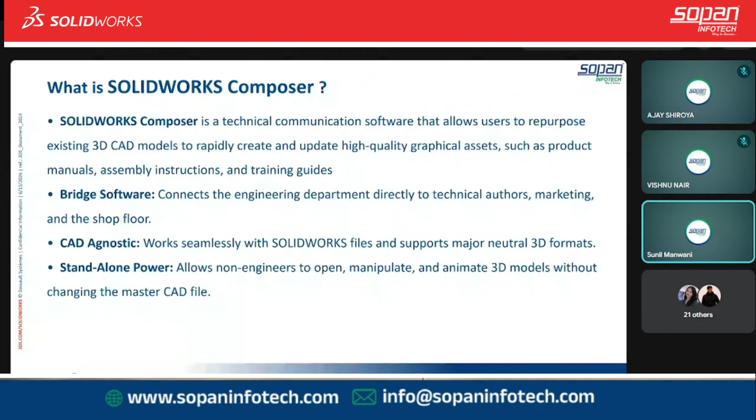So what are the technical challenges we face in daily life without SolidWorks Composer? There is a broken data associativity.

Documentation updates become manual and time consuming whenever the design changes. Every time there's a design change, we have to create the model again, take a screenshot, then input it into a service manual or similar document, or make exploded views repeatedly. That time is significantly reduced in SolidWorks Composer.

Engineering teams spend unnecessary time preparing screenshots, manuals, and illustrations. Let's say somebody is working in an NPD department. This is a very boring process for them, making manuals, taking screenshots, and defining everything that even a simple non-CAD user could do.

We can create exploded view animations and assembly instructions without failure and without significant effort. We can easily manage those.

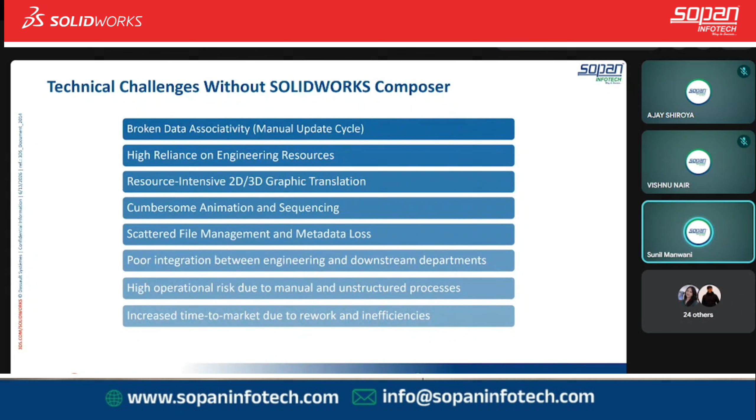These are the kinds of deliverables we can easily make, like instruction manuals, sales and marketing content, or maintenance manuals showing where to lubricate and how to assemble the equipment.

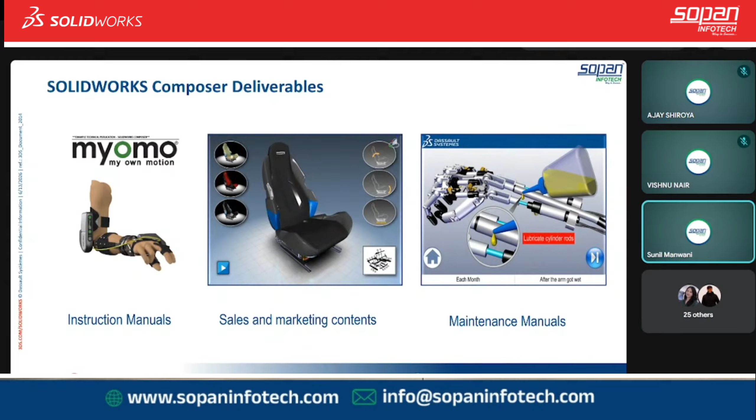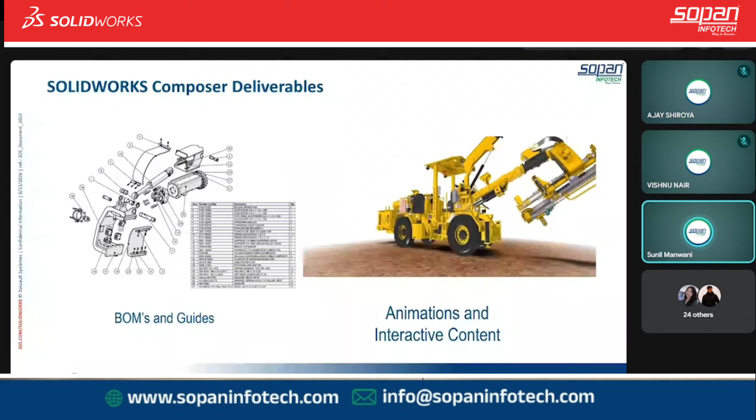Then we can make a BOM guide. We can show each part very clearly, what components are used, how much, what the quantity is, and we can also make animation and interactive content.

I will show some deliverables we can create from SolidWorks Composer. Here's an operation manual you can see made simply from this. I made this document purely from the Composer only.

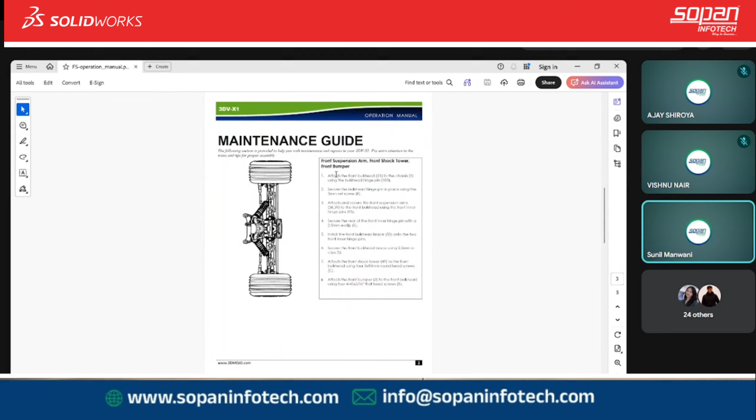So this is kind of a maintenance guide you can make. This is the everyday documentation we used to make, and we have to make it easier for the customer's process.

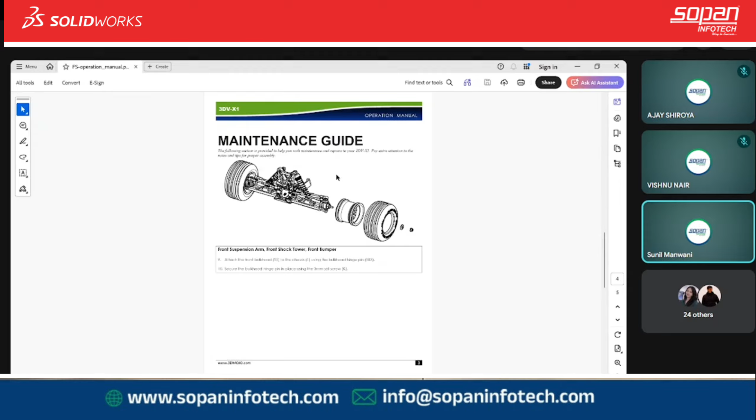So this kind of suspension arm is there, and we want to show how it will open and how you can do the maintenance. You can make this kind of guide. What upgrades are there, you can also show this.

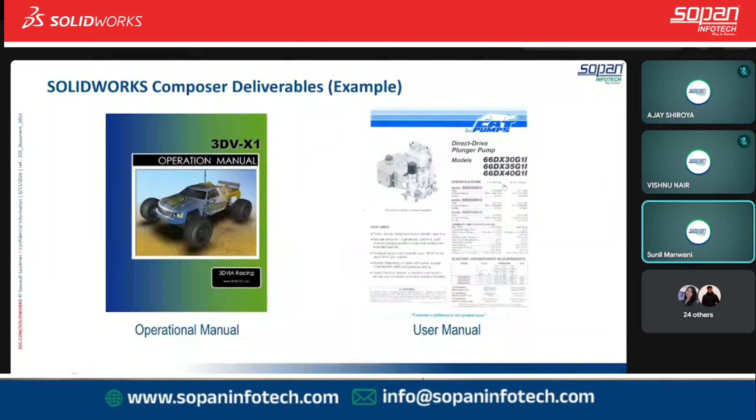Similarly, you have seen this kind of document also. If there is a pump, we have to define the whole format and everything, what parts are being used, and how they will assemble themselves. That we can also illustrate.

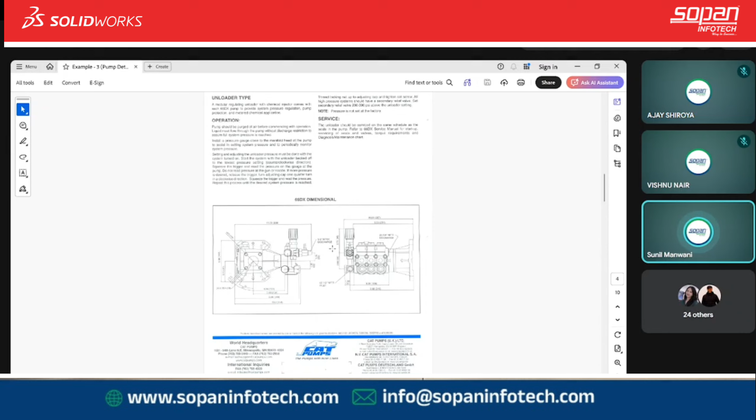This kind of product we can easily make from the Composer. As you can see, the dotted line shows how it will fit and where it's coming from. This kind of detailed illustration makes it easier for the maintenance guy or service guy to assemble or disassemble the components.

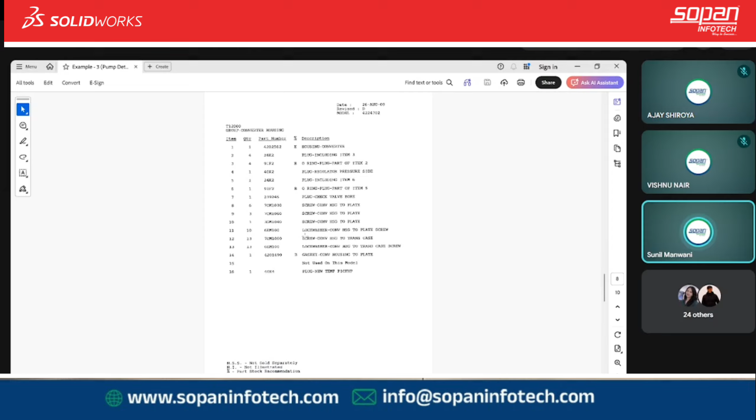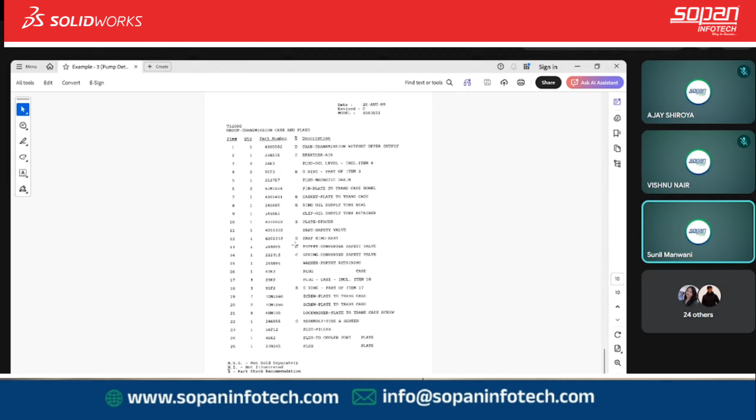You can numberize everything, so whenever there is a part change, someone can significantly reduce the time to find the name of the part, and you can replace the part very quickly. You can define what part this is, and this has only the details.

Similarly, if I want to show a customer how the product will look, what dimensions are there, and how it will turn and everything.

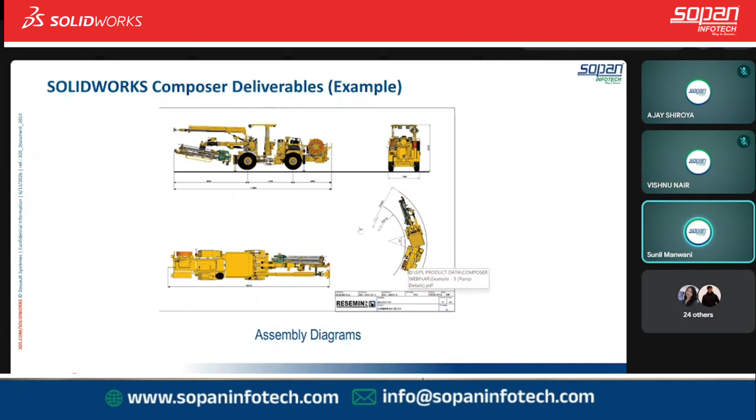We can take it out this way. We can make it in this template also, or use this template also. If you want to define the BOM of the product, we can do this. It's a very easy and convenient way to show, and that too without any CAD software knowledge.

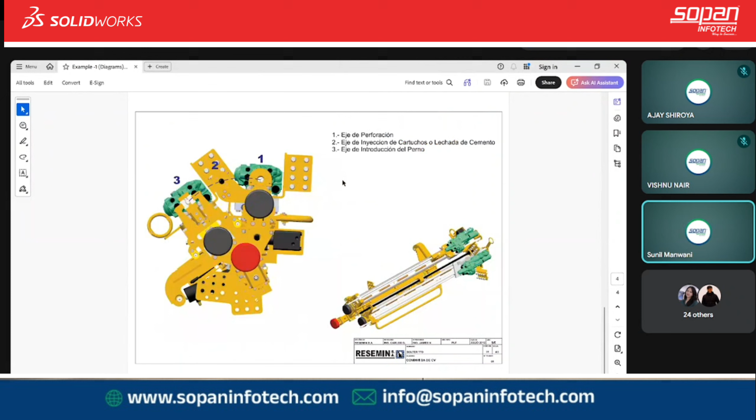So we will quickly go through the live demonstration, how it will help us and how we can convert those.

So let's say I open one document. Okay, so we talked about the animation part. They have made one animation out of it. You can see, if I play, I can make this in a template also.

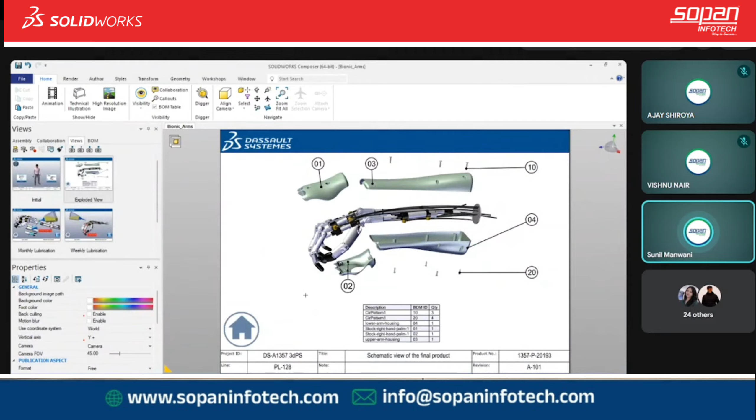In this kind of template, I can make it easily, and it's so interactive. I can make it in a PDF also. If I click this, it will show me the detailed BOM of the part. Okay, then if I click to the home part, it will come directly to the same position.

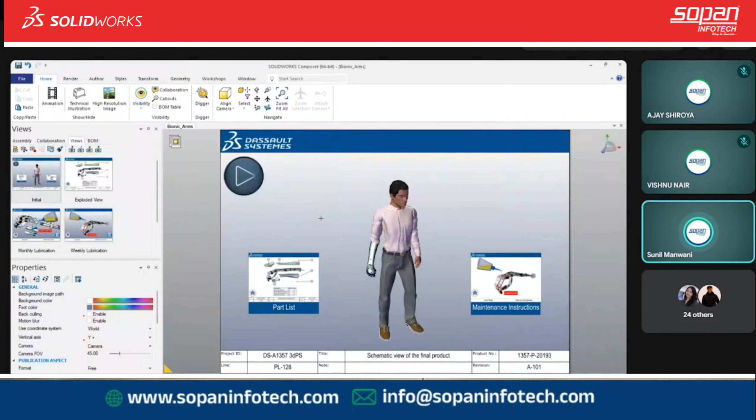Similarly, if I click on this, it will show where it is coming from and how it will move. We can make these kind of animations also. Okay, if I want to make, let's say, a video, how it will assemble and deassemble. So I will play just one video of what I have made out of this. We can do this in the same also.

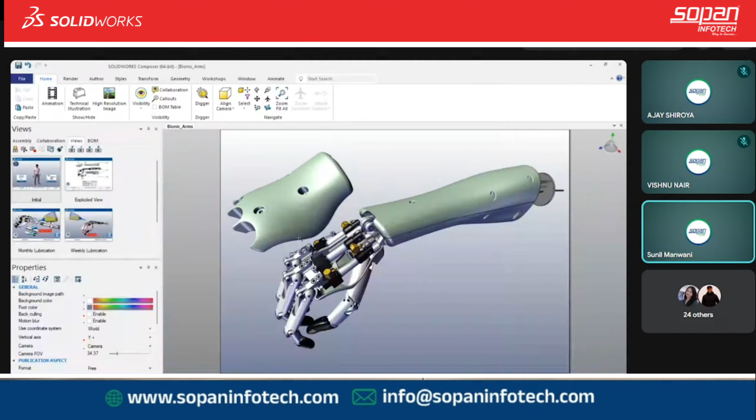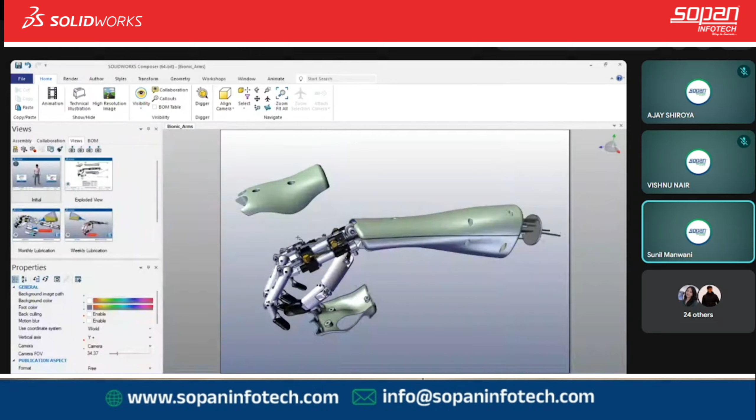A very detailed video and detailed explanation of how we can make interactive videos, and you can easily see how it will move. It will take a moment to easily assemble or disassemble the product.

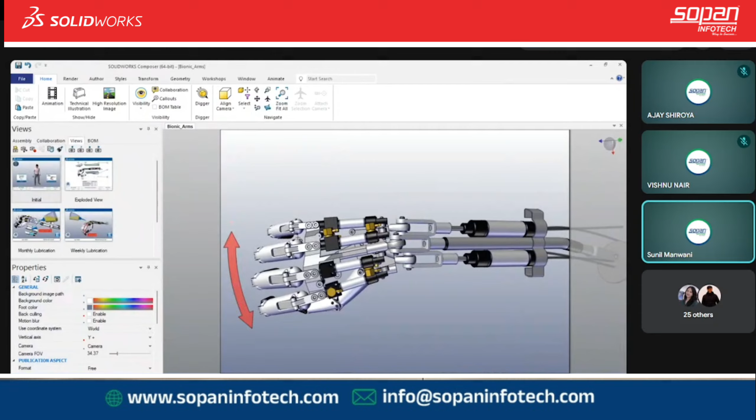You want to show how the signals, which wire cable, are responsible for which movement.

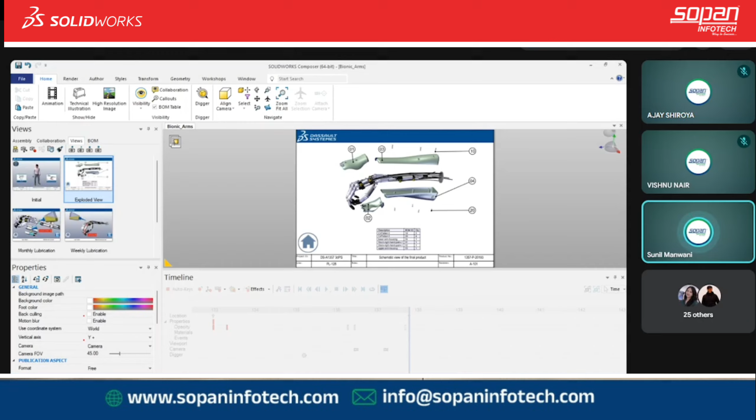Similarly, if I want to, we can exploded view and BOM out of it. We can also see that. And if you want to make this, there is a BOM table. When we click this, it will open the animated tab. You can see and close this.

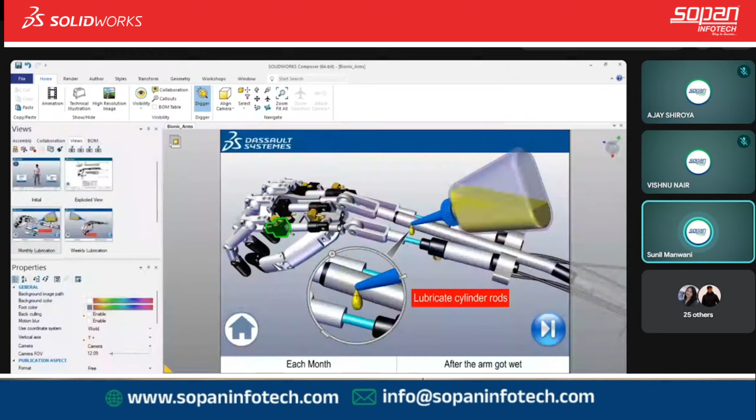Okay, now if I want, so these kind of animations and views we can create and make it easily. This shows exactly where we want to do it. Similarly, the video will show how the movement will work, how to make this, how it will look in the front view, or how it will move around like this.

And when you open any file in this, just like a feature tree or a component tree, you can see there is one component tree also there. So whatever you want to choose, let's say I want to show only this part and the other part should be hidden.

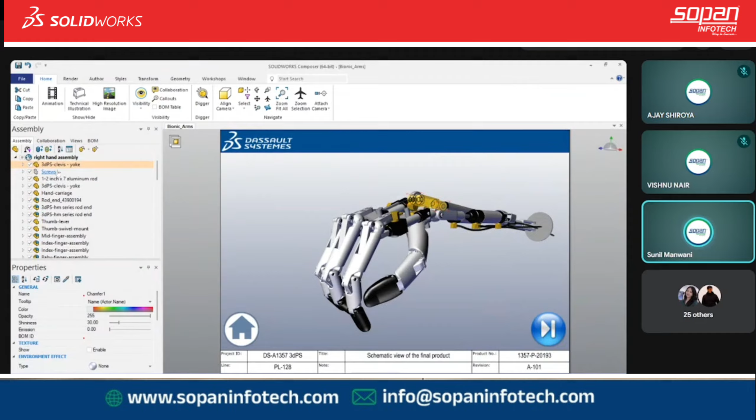So whatever I do, click, and let's say I want this also. I will just right click on it. There is some eye icon. You can see the show selection and hide others. It will show that certain part only, and then it will zoom it out for you. Okay, now you can work on it.

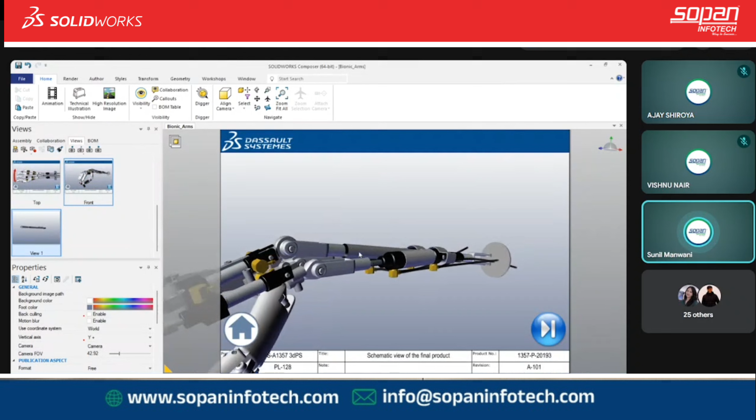Similarly, if you want to capture this view, you can simply create a view out of it. Okay, so it will show like this. This is the original part, and this is the view you have created. Okay, it is that simple. You don't have to just move it around and everything. A simple non-CAD user can easily make this.

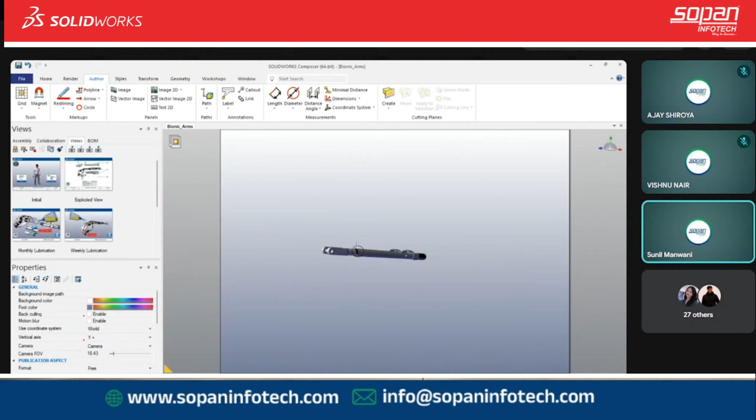Similarly, if I want to, let's say, indicate some part, you can create this. Okay, that also you can create. Similarly, in author you can create some arrows also, for whatever you want to do.

Now let's say you want to open some different kind of documents. Also, when you open files, as I told you, you can use different kinds of components and files - all kinds of files are supportable. So you can see there's one STEP file also, in 3D XML. You can open IGES, you can open STEP file, PTC, Pro/E file, assembly part file, Pro/E family part use. So it's not just limited to SolidWorks. If you have any kind of CAD solution, you can use this software to create animated videos and everything.

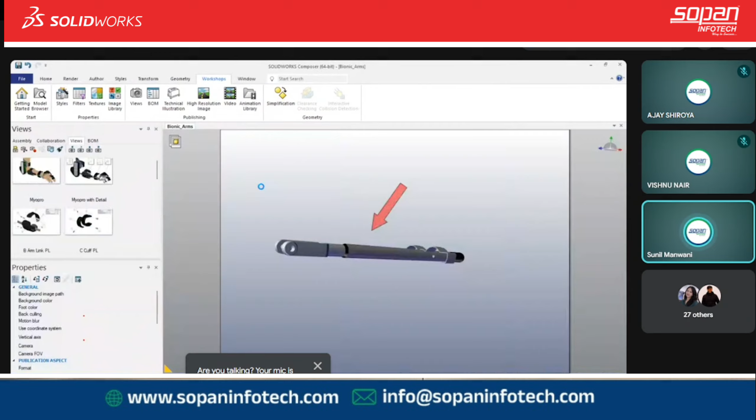Let's say you should open some instruction manual. Okay, so this is kind of an instruction manual I want from this. If I want a detailed view out of it, so I have made one view like this. You can show that image and the product numbering also. Let's say I want to create a BOM out of every product. Yeah, you can create a BOM like this.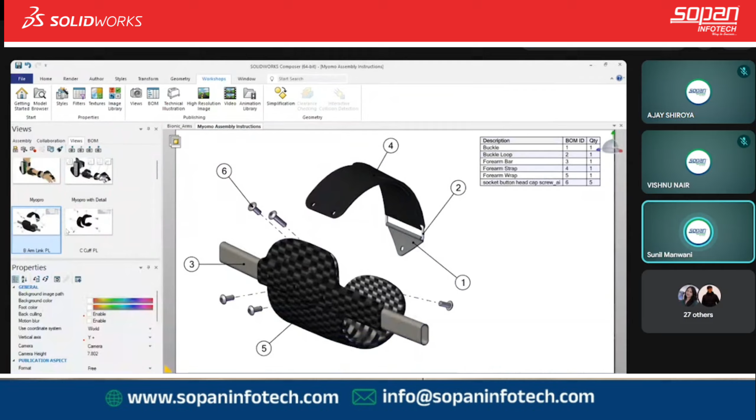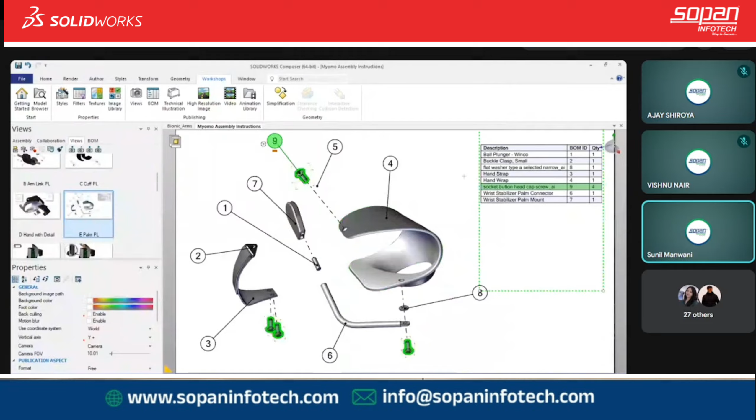Similarly, we'll create a BOM for this. It's a very interactive kind of software. You can easily make and create parts and everything. You can create an exploded view and animation out of it, with the BOM also inside.

Let's say if you want to show the maintenance guide, this is the battery opening, and you want to create a battery opening out of it, and create like this, how it will assemble. It's simply very easily created.

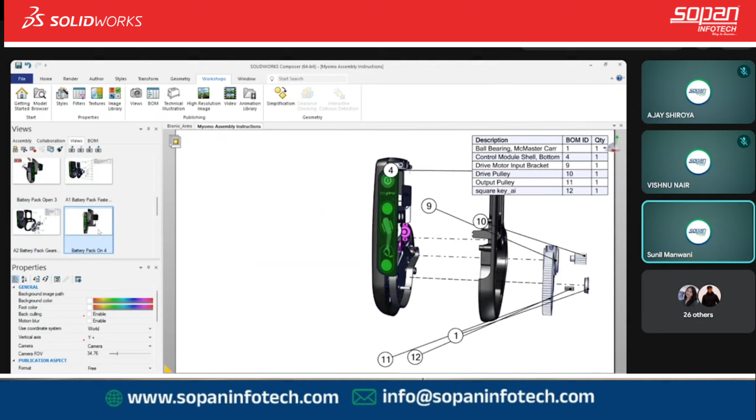Every view you want to create, if you want to highlight one component and hide others, you can click in and see the right icon with so many options. If you create this show selection and ghost others, it will ghost the other documents also.

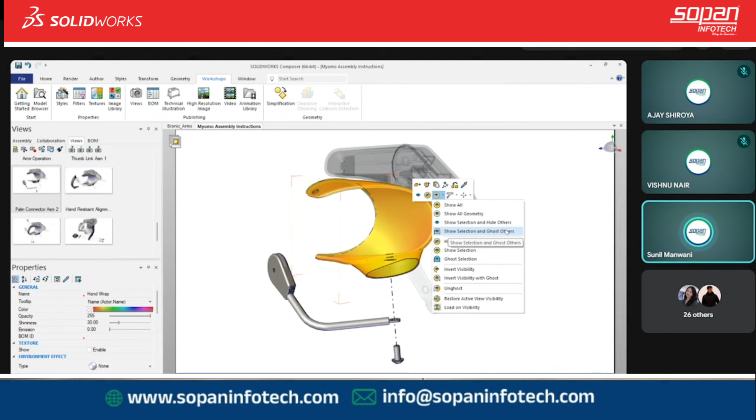Let's say I'll go in this document. Now I just want to show this component, the grasping motor cover, or let's say the grasping assembly. I want to show it and also select this. Now if I want to select only this component, I can do this.

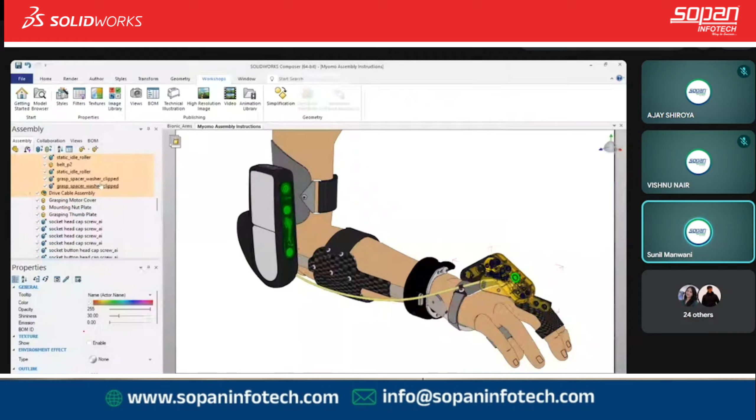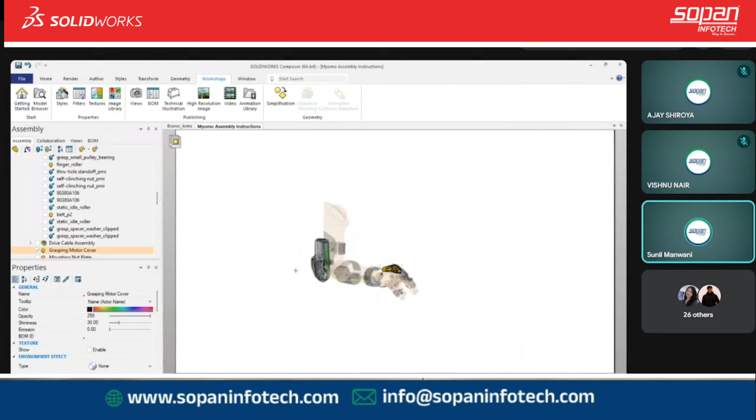Now I want to capture this. Okay, it will zoom in for you already. We just want to capture this. You just create a view. Let's say you want to name it grasping assembly. So it is that easy.

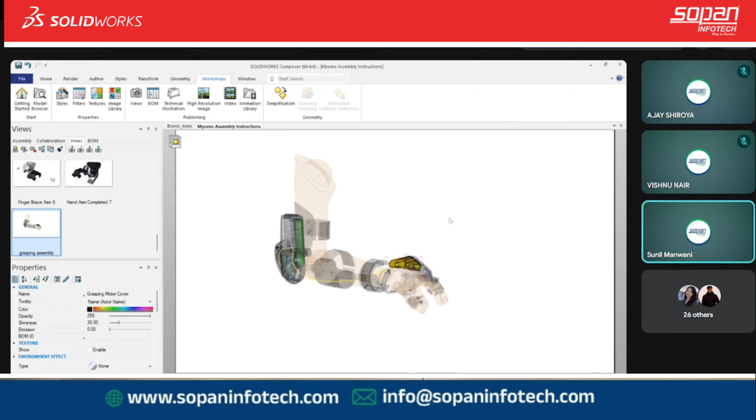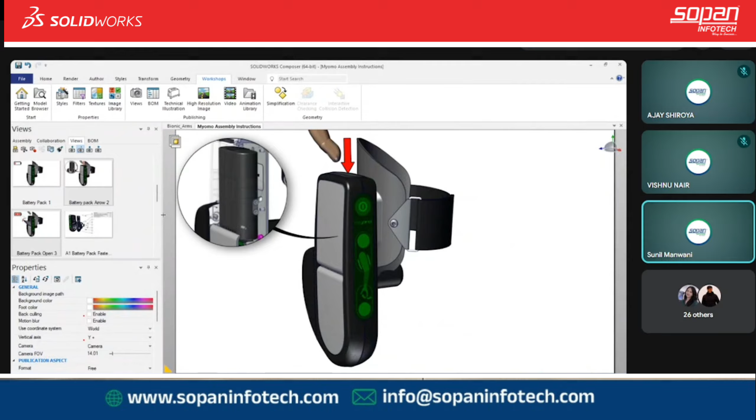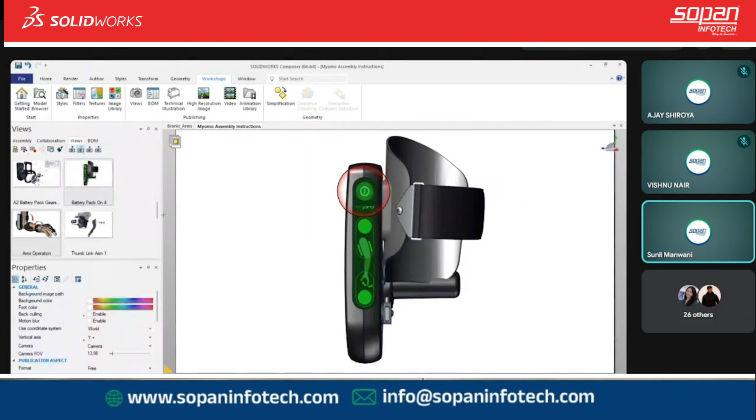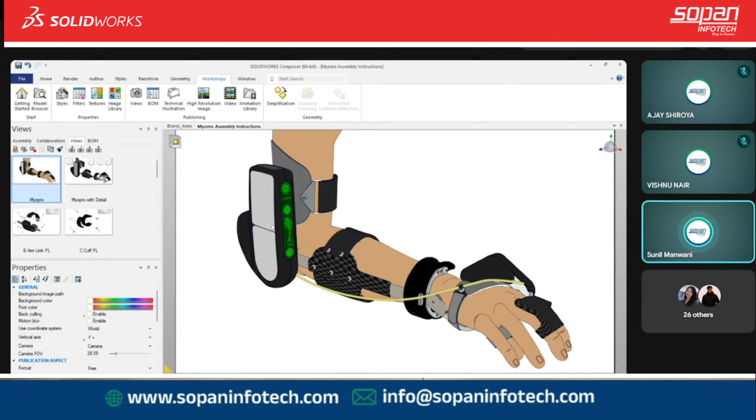Okay, I will go through with this, and now I want to play everything. So these kinds of things you can do. This is the capability of this.

Similarly, let's say I don't have time, I want to explode this in a linear view. You can just go, there's one linear option, select this. You can select the whole thing, and then decide how you want to explode it. Let's say I want to explode it, so we can see.

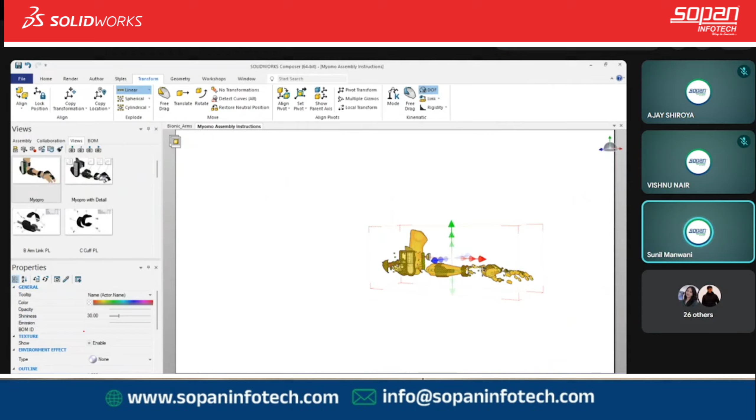Now, if I want to move in an upward direction, we can do this also. I don't want this, you can go back. Okay, it is that simple.

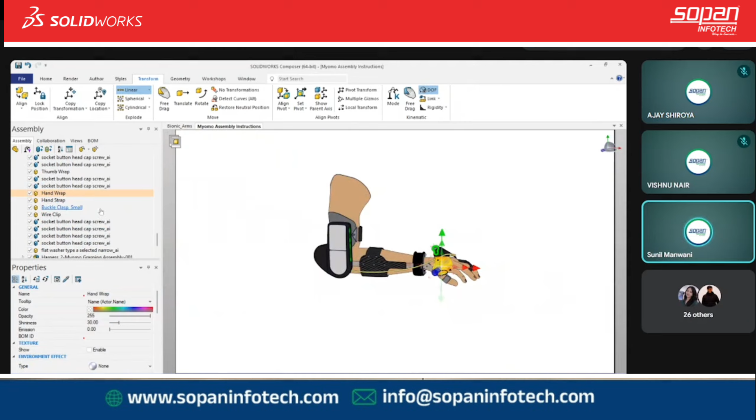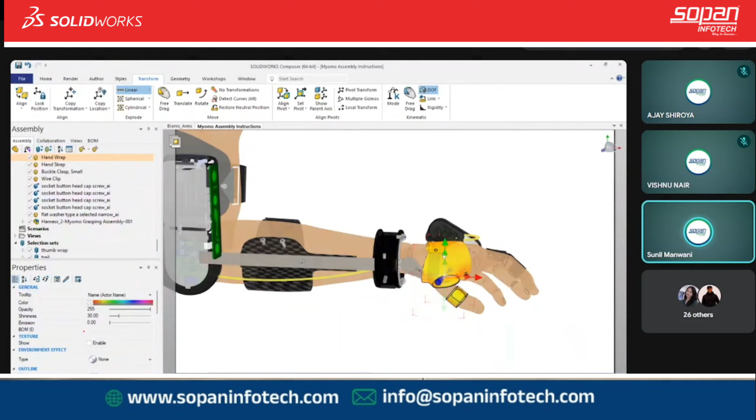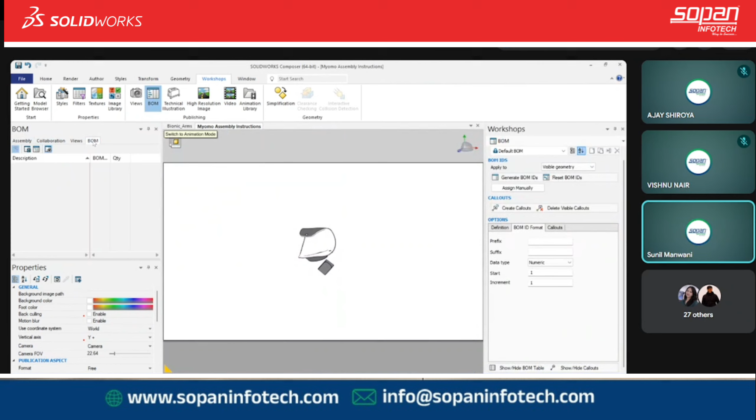Now let's say I want to create a BOM out of it. I will first capture this view, then go to the workshop and make a BOM. Say generate BOM ID and show table. That will show like this.

Want to create a callout? It will say select this. You want to create a callout? It will create one like this. And wherever you move the selection, the balloons will move themselves.

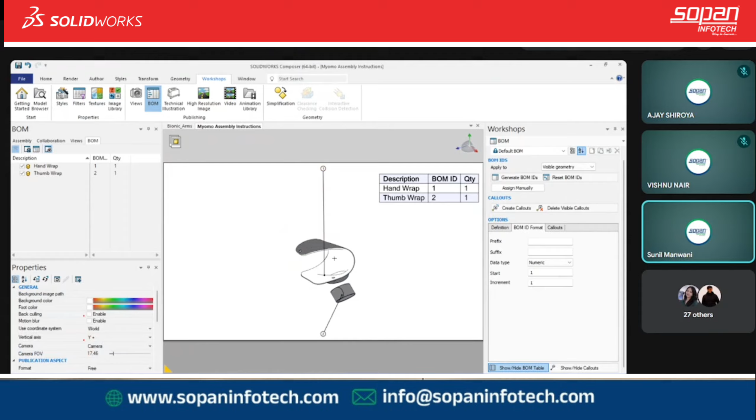Okay, let's say I want to rotate this part, zoom in, zoom out. It will change accordingly, so you don't have to arrange the balloons every time. Now I want to capture this, we'll go to the views, there is a corner option. This is create view, okay, we'll capture this.

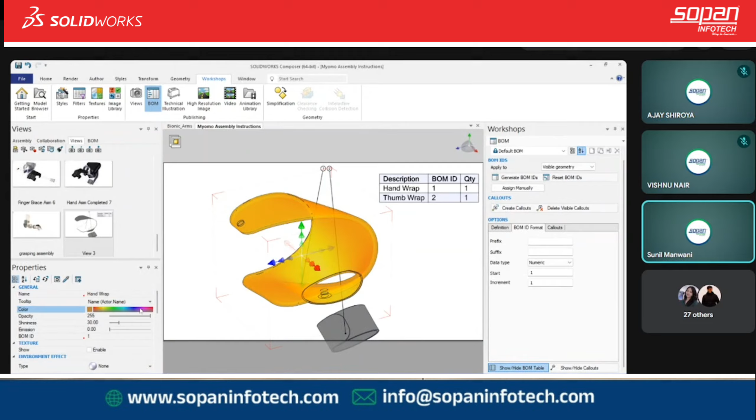Now I want to change the color, let's say to green. We'll just go and select this green color or a red color. You can colorize also. In SolidWorks we see there is a total component count, total parts. Here you can see there is a total actors count. So whatever, if there is a washer or a screw and one part, here it is called an actor, it's a part of a film.

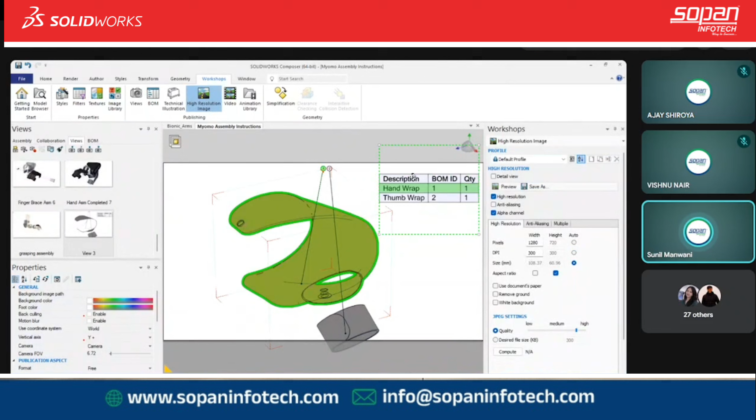Okay, so let's say you want to create one image out of it. You can just go to the workshop, then high resolution image. You can select it and define the height, whatever quality you want. What aspect ratio you want, you can define it, and how much quality you want for this.

Similarly, if I talk about a video, you can go for a video. Whatever kind of video you want, a viewport video, HD video, full HD, 4K, you can create this.

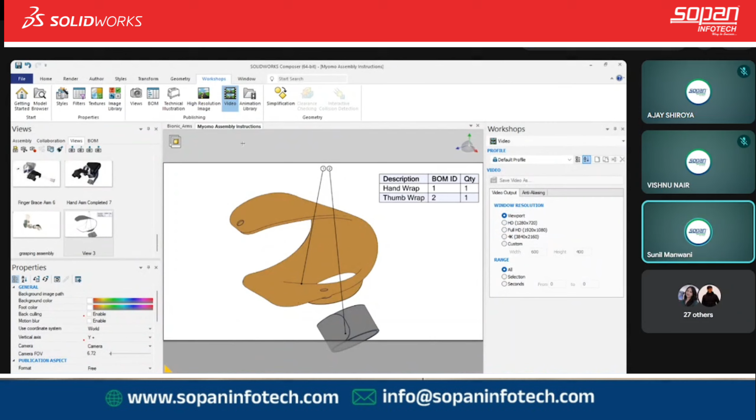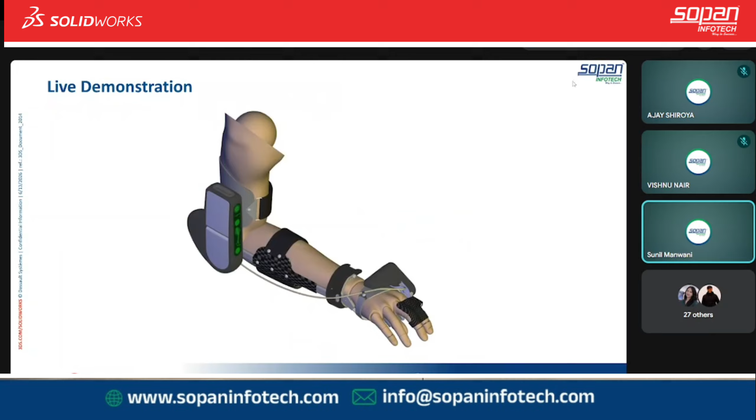Let's say that I've shown you one video and I have taken it out. Let's go and show the video. The video we made, this kind of quality you can easily get out of it.

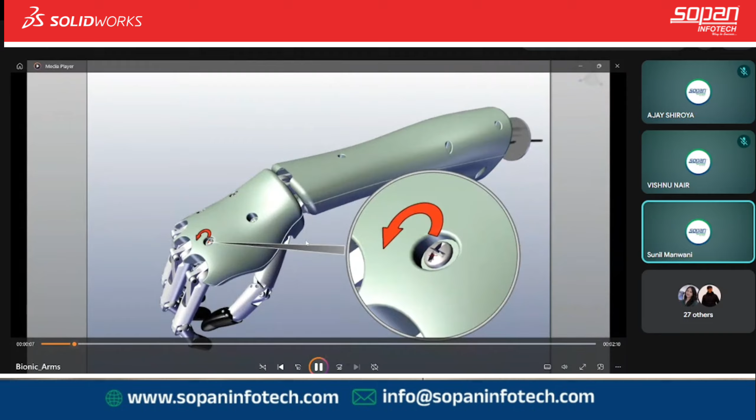So it's very interactive, very simple, high quality images and high quality video you can create from it. And it doesn't require a CAD person to know everything and do everything. A non-CAD user, simply a guy with a simple laptop, no high configuration needed, very lightweight software, you can create and make this.

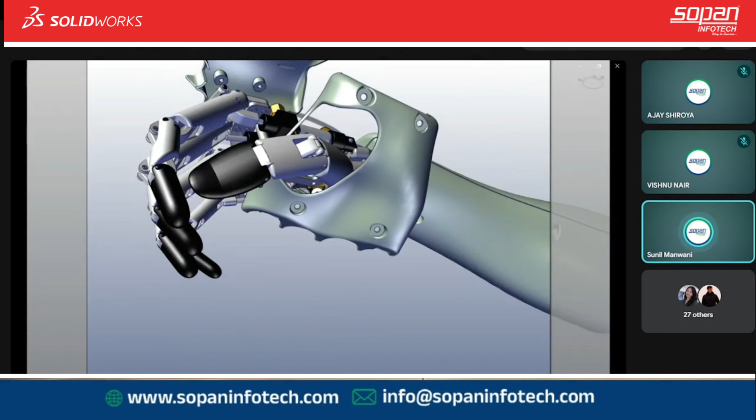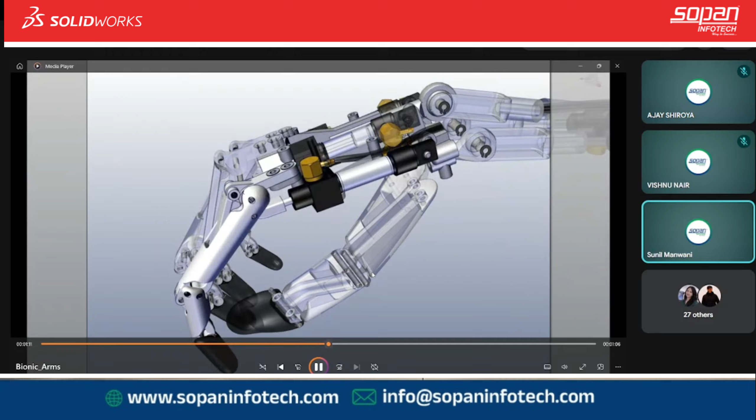Okay, this kind of video, this kind of motion you can see, very detailed, very high quality. You can generate it by your own, it doesn't take much time. So this kind of video you can do.